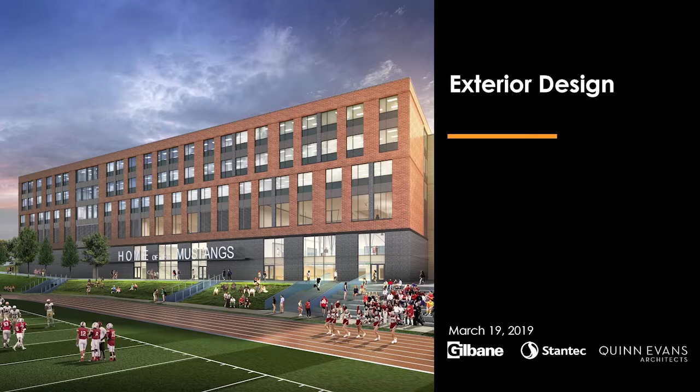What it's really going to begin to look like when things get set in terms of materials, benches, and the like. So I thought I'd share just a couple of pieces again around the exterior design. This should be a very familiar image to you - this is the back side of the high school, the north side, if you will.

These 3 levels are all triple height volume representing where the gymnasiums are - this is the auxiliary gym and the main areas. You'll remember that in the design, the 3rd floor is where the academic wings begin, so we've got the 3rd floor starting here, 4th floor, and 5th floor. You'll know right away this is the fat bar of the building as opposed to the skinny bar, because the skinny bar is 4 floors.

This is the fat bar of the building, looking at it from the perspective of the field. One thing to note is that the grade down here, where the existing bleachers are, is significantly different than the grade when you come down the ramp from the parking lot. Now when you pay for a ticket, you're up at this point, making a loop, and then there's a rather steep grade down to where the bleachers are.

This design, right at this point, will be the deepest area of excavation in the building, going down two more stories below here. As they dig that out, there will be significant shifts in the topography around the stadium and this corner, really flattening it out and allowing the grade to be much more gentle.

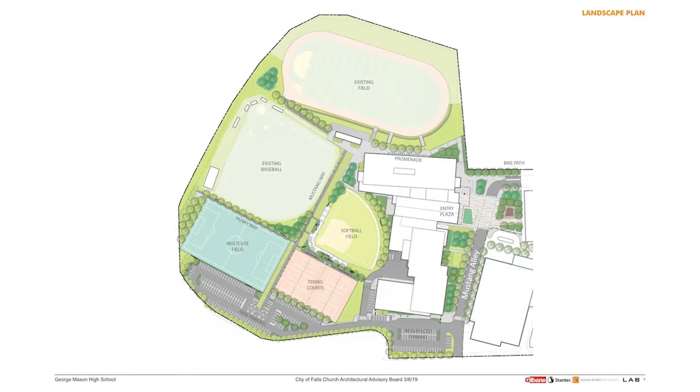The landscape plan is starting to come together, and we're looking at native plants and native trees. Some of the native species we're considering are black gum, willow oak, American elm, red maple, Virginia pine, and flowering dogwoods. This is a coded map, so each species has a number—black gum is 1, willow oak is 2, and most important for what I'm about to say, 4 represents the red maples.

You'll start to see where these numbers correspond to the current planning of where the trees will be. I wanted to point out that 4 is the red maples because there's a bank of red maples here, another bank here, and a couple here. What's kind of fun is that in the fall, these red maples turn brilliant red, and during football season, as our visitors come in, they'll be swarmed by a sea of red trees around them, as well as our team.

So we thought that was kind of a cool play on the way that they're starting to design this. One of the things we're really excited about as a consequence of doing this site development work and looking at these trees is we actually achieved and exceeded the tree canopy that we had put into the RFP for our developers. We had an aspirational number out there, and we weren't able to achieve the aspirational number, but we did get to what we said we would get to in the RFP. That was part of the work from the Tree Commission influencing us, and we're really excited about their advocacy.

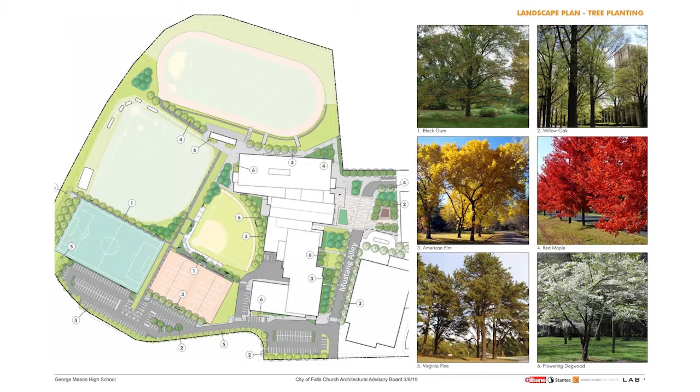So you'll see a lot of trees on the site. Some other things you'll see here are bioretention plantings.

One of the things this building speaks to me about is this whole idea of environmental sustainability, and that also means how we're dealing with stormwater across this site. One of the ways we anticipate working through some of the stormwater issues is through these bioretention fields. You'll see river birch planted along these areas.

Bioretention plantings along with some hardscape will look kind of like this. And you'll also see some other landscaped areas that become kind of no-mow zones, areas that won't necessarily be attacked with weed eaters or any kind of cutting.

Where you see these numbers on this area plan, for example 3 and 1, this is where you'd see these bioretention plantings that are kind of low, and there would also be some river birch in there. This corner is called Mustang Way, and this is called Husky Way.

At this corner, you would see sort of a swale that would incorporate some of these low plantings along with river birch to capture some of the runoff from our fields and other areas.

There are bioretention fields here, here, here, and then as we work around to the front, you'll see one here, here, and here in front of the school and along this direction as well.

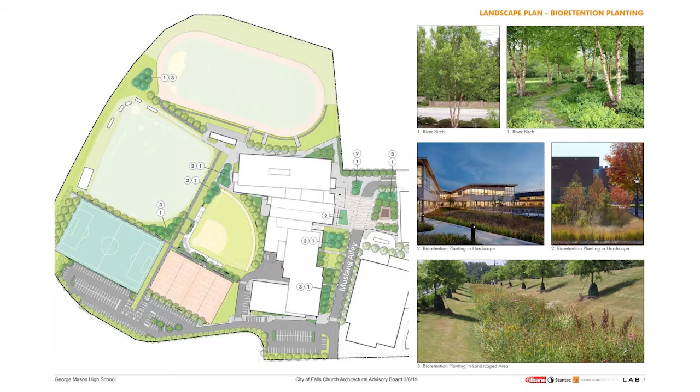A couple more things to point out as it's starting to come together. Again, this is the front of the school, and this is the woonerf area. This will be a different kind of material than the paving you'd see along Mustang Alley. Once you hit this woonerf area, you'll start to see some concrete changes, some special types of patterning will be in here, but it will clearly signify that this is the front of the school and where students will come in.

This area runs all the way back to the 10-acre development, so students can walk up and through it, and once they hit this area they'll hit this new type of material, be able to cross the woonerf. As they cross, they'll be crossing an area. This will be the pickup and drop-off area for the buses.

This is not the Kiss and Ride Loop, I'll talk about that in just a second. But as they come across this area, it will also be protected with bollards that will move all the way along, identified in the lower right. That's what the bollards will look like, from a safety perspective.

Where you see these blocks, it's hard to see from where you're sitting, but those are Socrates benches. There'll be a number of these strewn throughout so students can sit and have conversations. And then we have about 85 bike racks around the building, trying to achieve roughly a 1:15 ratio of bike racks to students.

Some of them will be in this area, some will be back around in here. There will be some on the back side of the building, and some over by the field entrance, I believe, off of Route 7 as well.

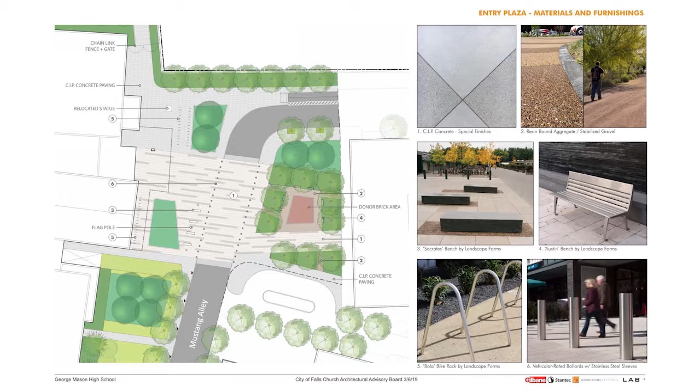The reason for that is it just gets too confusing in that garage with 187 spaces with cars circulating through, and we have very few parents that actually Kiss and Ride at George Mason High School. This would be specific to George Mason, not the Kiss and Ride for Mary Ellen Henderson, so we thought we could accommodate it here out front in a much better way.

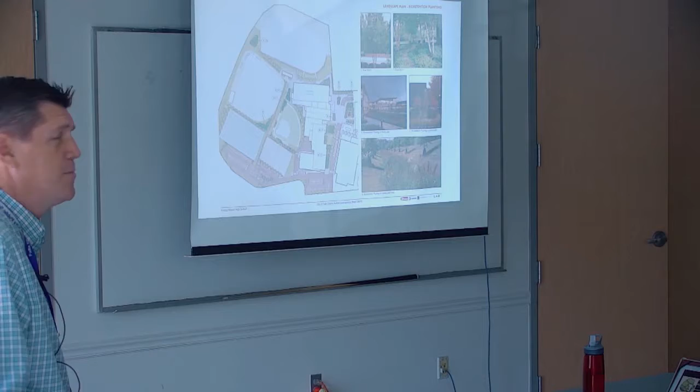Let me move ahead. A couple other things you'll see. This is another piece that identifies what trees are going to be used and where. I shared that before, but again, this is a 3, 4, and a 5.

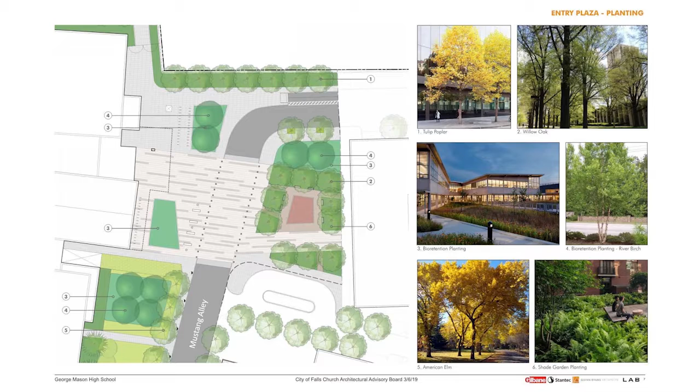Here you'll see some bioretention planting. You'll see some river birch, and then some American elm in this area to work through some of that stormwater management. This is the curve at the bottom of the ramp, right at the corner of the stadium field.

You might recall this is one of the tunnels, and this is the other tunnel that comes out of the bottom floor of the building. This one goes directly into the arts area, and this one goes directly into... I'm sorry, I have that backwards. This one goes into the arts area. I had it right the first time, didn't I? Yeah, they both go into the arts and PE areas, the locker room areas.

Anyway, those tunnels are there, and then there are some steps here down to the field. This, of course, is the stadium seating that's there. Here again, you'll see what materials we're using - some of that same concrete that's in the woonerf at the front of the school, and also some benches along this way. So if students wanted to sit on the benches, they could sit and watch the game.

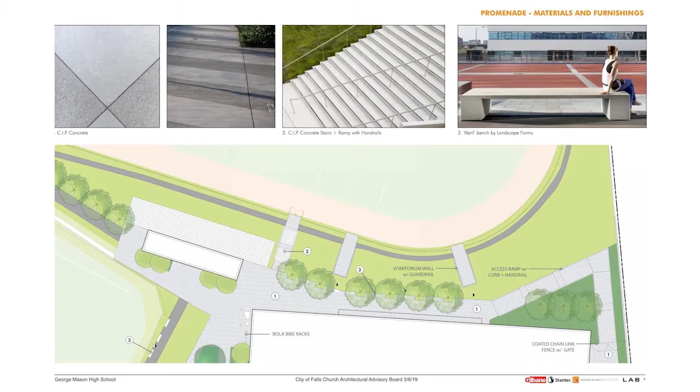Or, we have a lot of parents that currently will stand on the sloped path from the top of the hill down to the bottom. Some of that area will now have benches for people to sit on as well. Some of the other materials we're using in terms of trees - in the stadium bowl, that's this area we're calling the stadium bowl.

There will be grass, but we'll also have flowering dogwoods, some perennials, and these red maples that will be bright red in the fall when students come to see us.

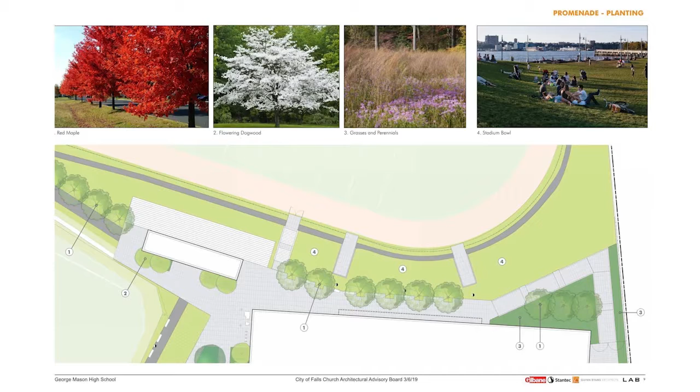Very quickly about the lighting. As you're aware, the stadium field and the baseball field are remaining, so those lighting stanchions will stay where they are. Of course, the new building will have new lighting, and the softball field has new lighting in the scope.

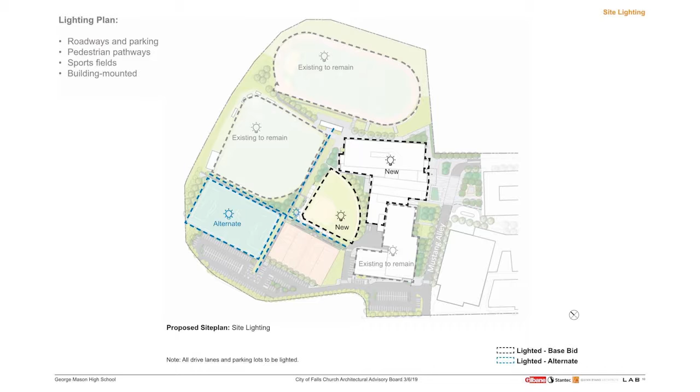Right now we have, as an add alternate, lighting for the multi-purpose field. We've been in contact with Danny Schlitt from Parks and Recreation, who's made a request in his capital plan for additional funds to help offset part of the cost for the multi-purpose field, because this field is used a lot by community use, but we also will be using it, so we feel we're a partner in that. We're trying to find a way to share the cost so that when we open this building, that multi-purpose field will be lit.

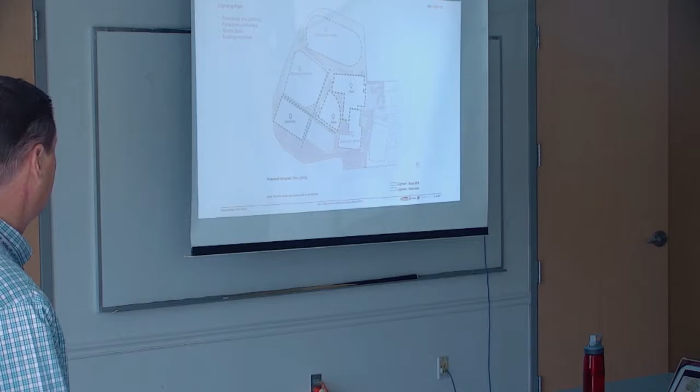Question: if there isn't funding for the lights themselves, will the infrastructure be put in no matter what? No matter what, the infrastructure will be there — it would be ridiculous if you don't. We will not be ridiculous. It will absolutely have the infrastructure there to be able to put the lights in if the funding for the actual light stanchions doesn't come through.

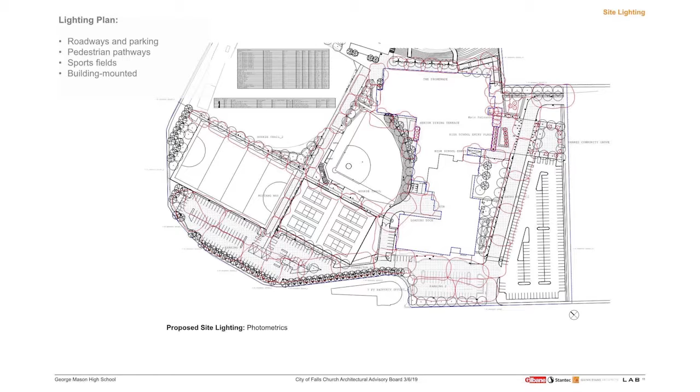This is just a lighting plan that gives you some sense — you can't tell exactly what they are, but those little red areas show what the light casting will look like. More importantly, perhaps, are the types of lighting we're using. One of the strong advocacy pieces at the very beginning was to look at how we use dark sky lighting, so the light fixtures proposed are all dark sky lighting. The light will shine where it's meant to shine as opposed to all over.

What's nice is the types of lighting fixtures selected, from wall mount to pedestrian to road and parking, are very similar in nature, so you get a consistency across the property, as well as the bollard lighting structures you'll find throughout the path areas and around the building.

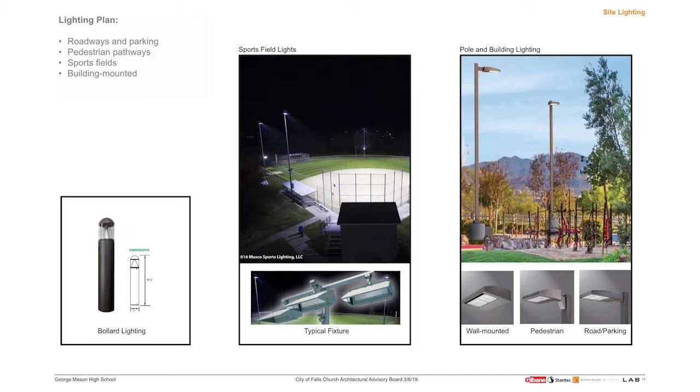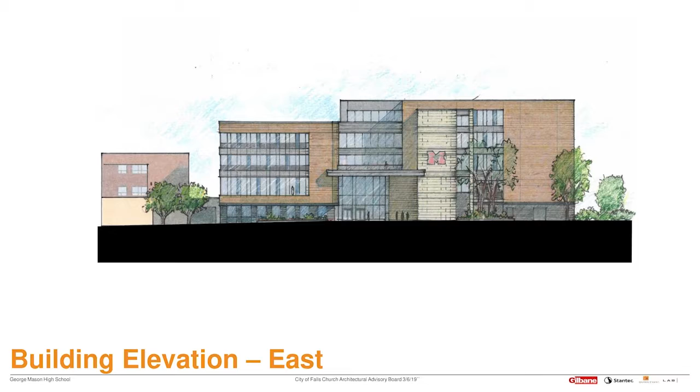Again, just to remind everybody, this is the thin bar, the fat bar, and the heart of the school is right here.

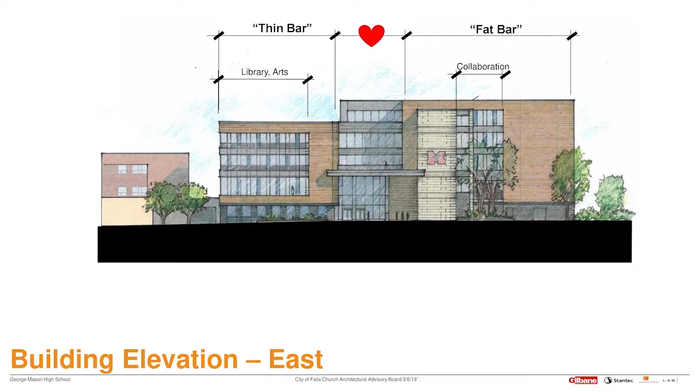Here's a better look of it. So here's the brick I was mentioning, and here's the different type of brick — a little larger format, kind of breaks it up. And then I think these are metal down below, right here. Yes, so these are sort of dark metal, and then glass and a little bit of blue glass and spandrel glass put in there as well.

And these are the bioretention areas we were talking about. Any water that hits the roof will sheet off into these bioretention fields and be dealt with through the storm water management process.

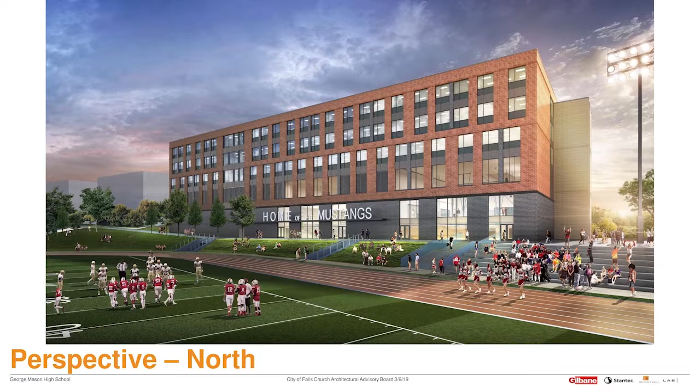This gives you a little bit more perspective, and then also there'll be a tree line. I've said it publicly and I'll say it again, that any Mason girl that hits a home run from the softball field and breaks a window gets $100 from me, because that's a long way. That is a shot to get to the field.

But anyway, up here you'll see a patio. This is the patio, you might remember, that comes right out of the cafeteria. So as you exit the cafeteria, which is here, there'll be a chance to come outside and sit, and that will have outdoor benches as well. So that's rather exciting too.

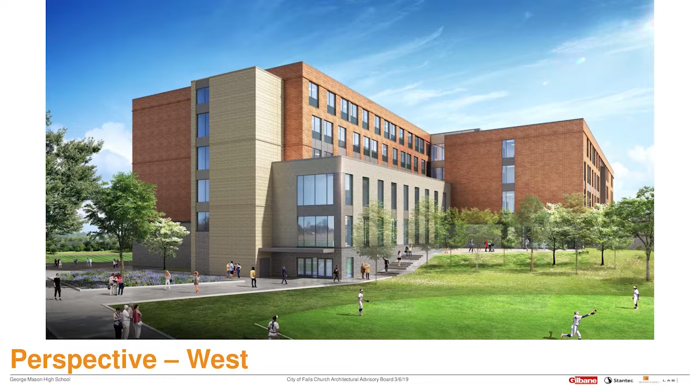So just some quick things about the schedule. We are again sort of in the design phase. We have completed SDs, we are done with DDs. We're getting ready now to reconcile the design development documents, not only with what they look like, but also from a cost perspective. Gilbane is currently putting their estimate together based on the new design development documents. We also have hired a third party to give us an estimate and see if those two match, because we just think it's good due diligence to have a third party also doing an estimate.

And then we'll negotiate out kind of where we are, and they'll move into construction drawings here. Those construction drawings will continue through groundbreaking, but we will negotiate the guaranteed maximum price beginning - actually we've started a little bit. We've been exchanging a few documents for execution of GMP1 at May 15th, and then execution of GMP2 in the July timeframe, July-August timeframe. And Gilbane will start working through permitting structures here in the city, and they've actually already submitted some documents.

We will start the new school in June. Substantial completion of the building should happen by December of 2020, and maybe as early as the end of November, depending on the weather. And then again, construction will continue all the way to August, because once the school is done, then we'll complete the outside, we'll complete the fields.

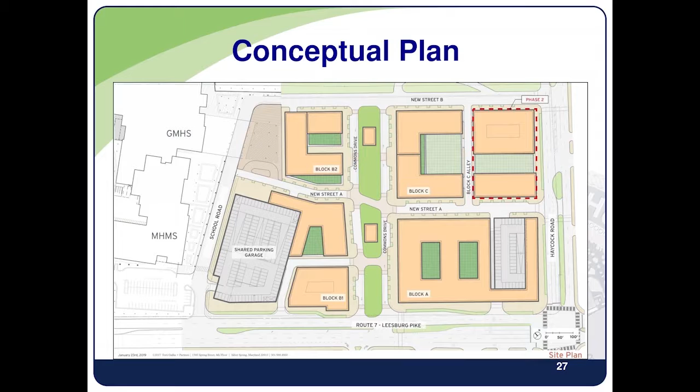But that plan has been presented to the rating agencies. We went to New York. We've really been briefing them on this plan for about 4 years. The city does have very strong bond ratings, and I think there's a lot of record of achievement in the city that backs that up.

So the development approval process: we're looking for city council action on May 13th for council action on the special exception application and on the business terms that would be in the comprehensive agreement. Then we'd have an 18-month period for site plan approval, and in 2021, again, that's when construction would start.

Now, with respect to the budget, we're looking for ultimately a council action on April 22nd on the budget, and we have public hearings on the 25th and on the 8th for public comment on the budget. So that's the information that I had. I don't know how I did on my time, but I appreciate your attention.